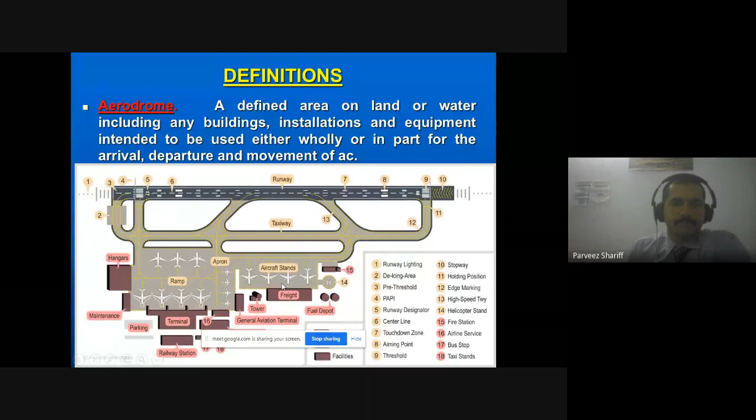Okay, so what is the definition of airfield? Airfield refers to an area of land used for takeoff and landing of the aircraft, and excludes buildings and installations. So basically it can be a runway. Airfield refers to a runway - an area of land used for takeoff and landing. So basically a runway, we can call it the airfield.

So airport means used for civil flying, established to handle international air traffic, and therefore includes the custom house, travel amenities and other things all together. We call it an airport.

The aircraft classification number is a number expressing the relative effect of an aircraft load on a pavement for a specific subgrade strength. So basically, every aircraft has some aircraft classification number. It means every aircraft cannot land on every runway, because that runway has some load classification number, we call it LCN, which can handle the load that the aircraft has when landing.

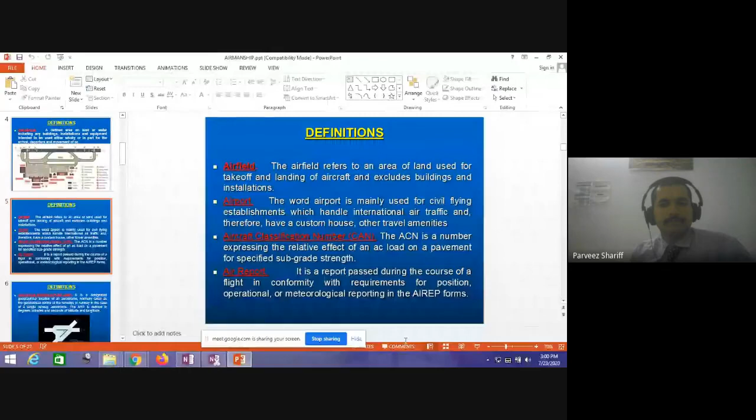For example, it might be a big cargo plane. That big cargo plane cannot land on some small runways where the runway is designated only for small aircraft, as it may lead to catastrophic effects - it may damage the runway as well as the aircraft. That is why aircraft classification number is a number expressing the relative effect of an aircraft load on the pavement for a specified subgrade strength.

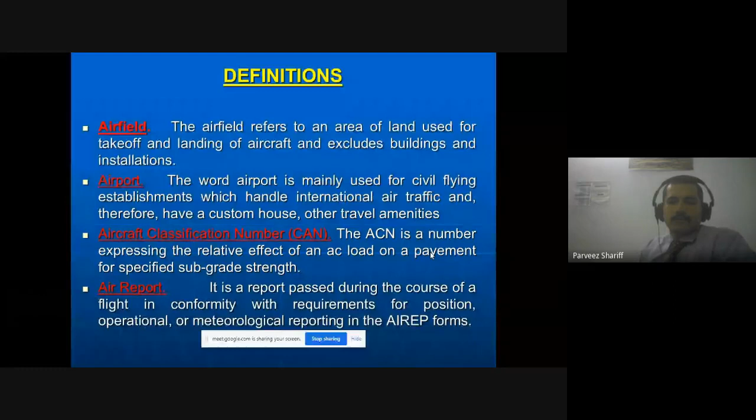So what is the aerodrome traffic zone? If we have an airfield, then from the center of that aerodrome, the point we take is the aerodrome reference point. From that aerodrome reference point, with a radius of say 1.5 nautical miles and to a height of say 2,000 feet, this entire area we call the aerodrome traffic zone. So any aircraft which needs to enter this aerodrome traffic zone has to take clearance from the air traffic control of that aerodrome.

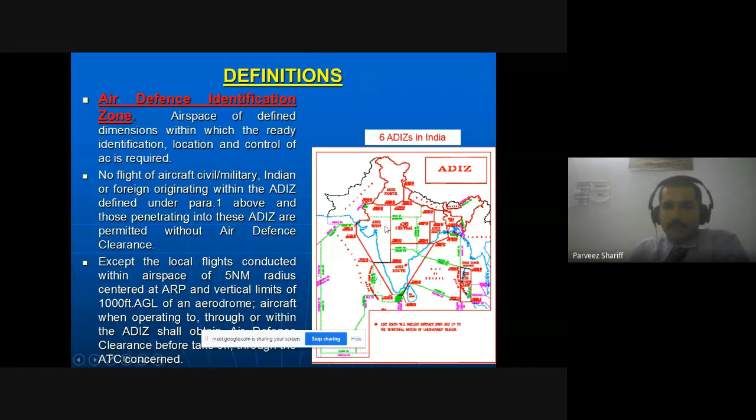We'll see one small video at the end so that we can understand how these air traffic paths are defined. Now there are different

boards and services: Air Traffic Advisory Service, Air Traffic Control Center, and Air Traffic Clearance. Air Traffic Advisory Service is responsible for providing service to aircraft when it is flying under IFR flight rules or IFR flight plans. IFR stands for Instrument Flight Rules.

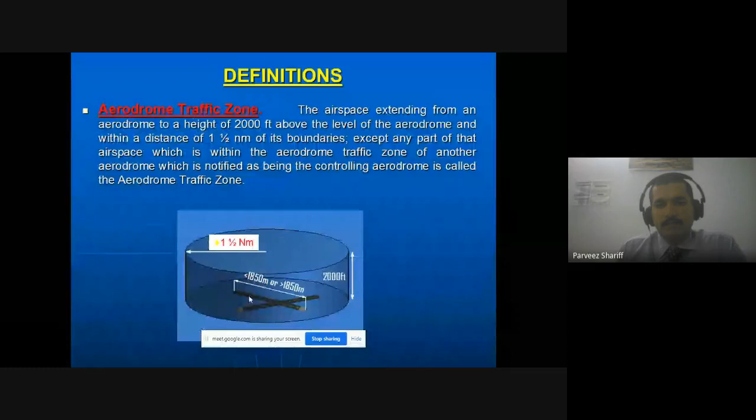Air traffic control centers operate within control areas, meaning any aircraft coming under the control areas. What is the meaning of control area? As I told you before, if any aircraft comes within this range and at an altitude of 2,000 feet, then it means it's within the control area of that aerodrome.

So if any aircraft is within that area, air traffic control center will take control of that aircraft and give the necessary information. It also provides a flight information service within the flight regions. The third service it provides is an alert service.

Basically, if any aircraft loses contact with any ATC, the nearby ATC will issue an alert to the search and rescue team, so that the team can find the last known location of the aircraft.

Next is air traffic control clearance. That is authorization for an aircraft to proceed under conditions specified by air traffic control. It means whether to take off, land, or hold position. Those are called air traffic control clearances.

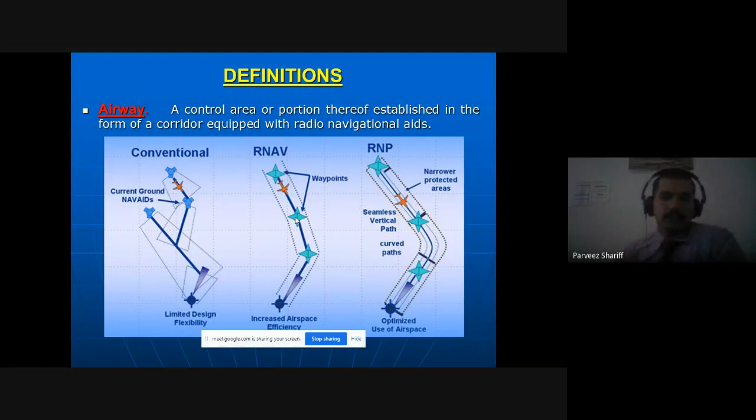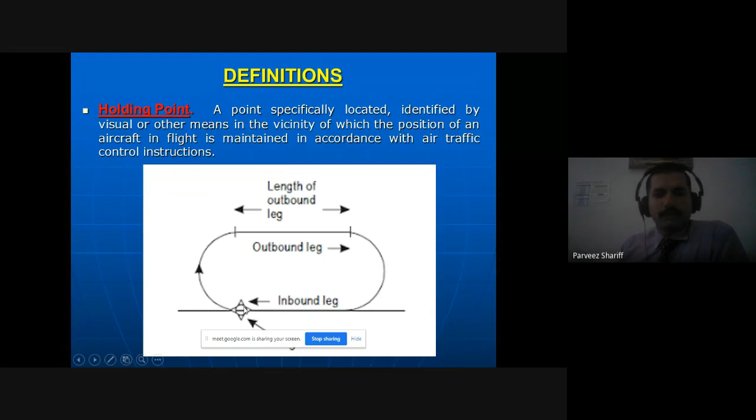So the holding point is, for example, if this is the taxi path, the aircraft comes here before it holds position. That point we call the holding point. Next, heading - what is heading basically?

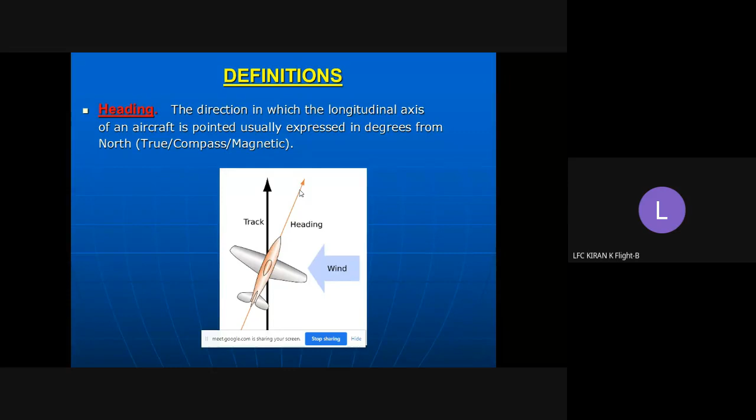The aircraft's longitudinal axis, where it points, that is called... direction? Direction of what, in which direction it is pointing? No, it is not like that. Heading and pointing - the heading direction and the movement direction at times will be different.

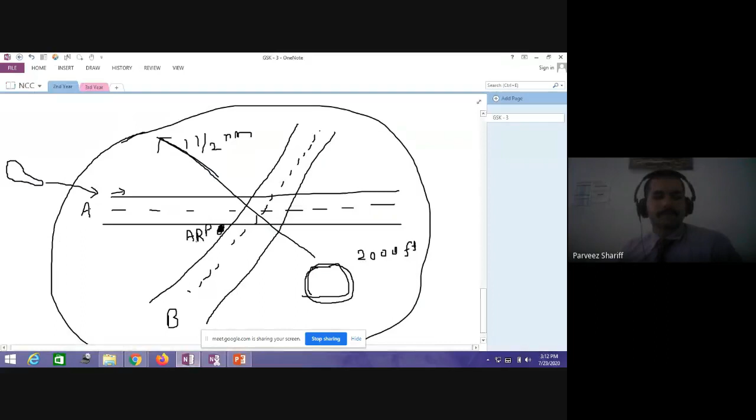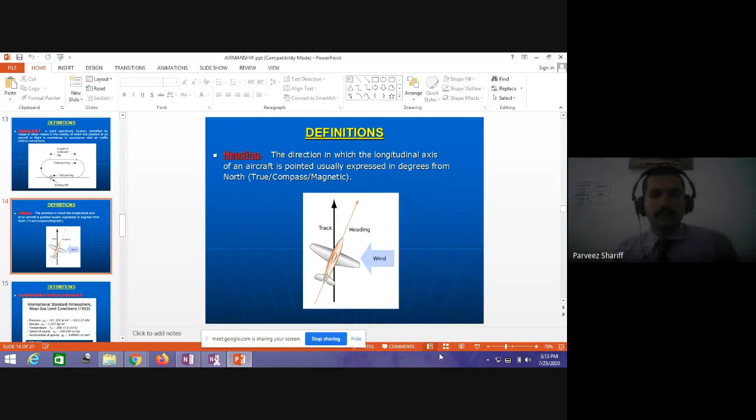So I am writing a 2D diagram here. The aircraft is supposed to move in this direction, and it is moving, but since the crosswinds are so heavy, sometimes the crosswind makes this longitudinal axis point in a different direction. This direction we call heading, and the other is the movement direction, actually where the aircraft is moving. This is measured clockwise in the compass direction, not counterclockwise - it's clockwise direction in the compass, which is indicated. So this we call heading.

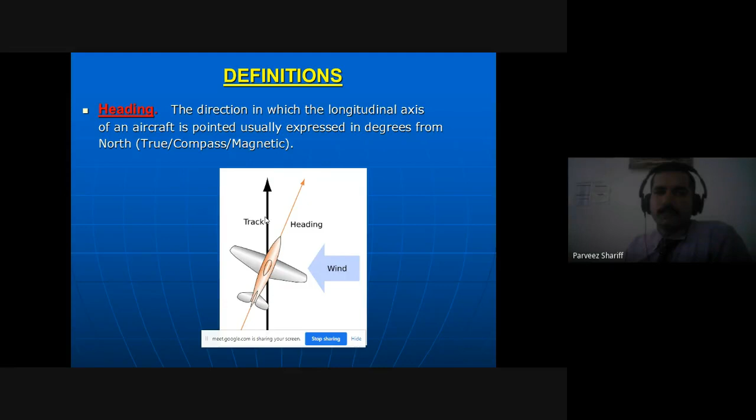If there is heavy crosswind, it tends to change the heading. For example, if you want to move at say 270 degrees, the heading might change, and it might be moving toward 280 degrees - the compass might show 280 degrees. Next, talking about the standards.

If you look into these standards, then the pressure level, the density of air, the temperature and speed of sound are mentioned here. The standard pressure at mean sea level is represented as 1013.25 hectopascal. That is its unit. And density of air is 1.225 kg per meter cube. And temperature is 288 Kelvin or 15 degrees C.

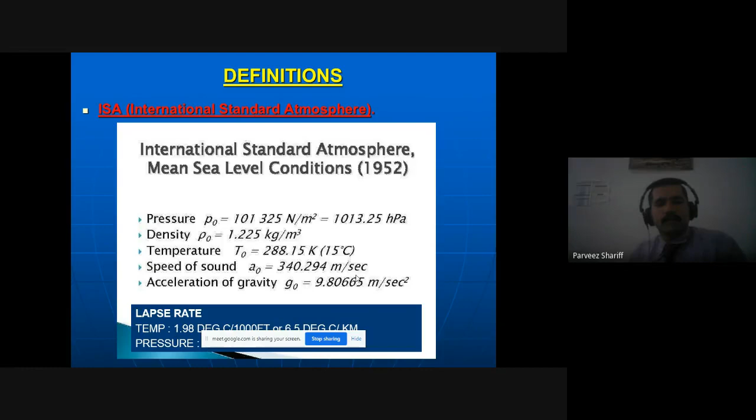And the speed of sound is represented with 340.29 meters per second. And the ground gravity, you all know, is 9.8 meters per second square. And if you look at the temperature variations, for every 1,000 feet, the temperature drops by 1.98 degrees. And for every 30 feet in altitude, the pressure drops by 1 millibar.

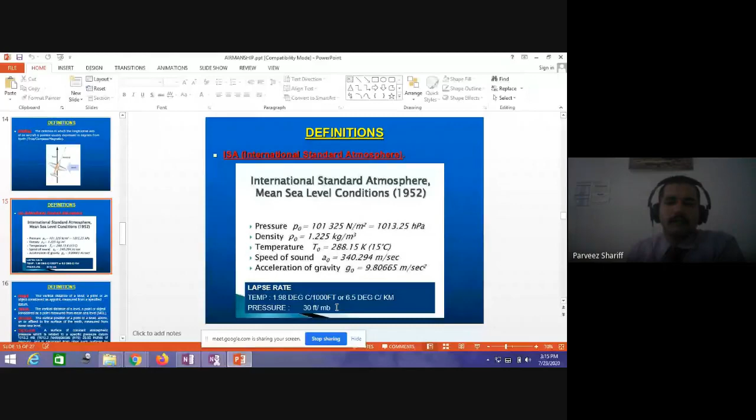Now we'll look into a few more definitions. The difference between height and altitude. See, height and altitude are two different things. So let me show you this diagram here. This is the sea, and say the aircraft is moving in this direction. Now, the distance from this position to this position, you can call this altitude, because we are referring with respect to mean sea level.

But when the same aircraft comes here, I'll just copy this. If the same aircraft comes at this point, then the distance between this land and the aircraft, we can call it height. Whereas if we again measure from this to mean sea level, then this we call the altitude. So this is the basic definition of height and altitude.

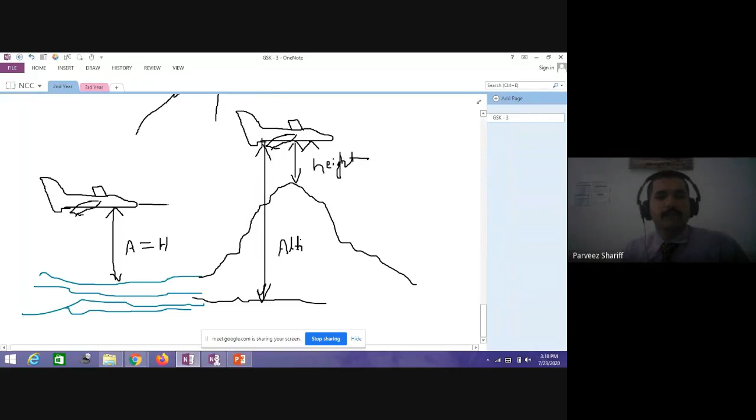Then there is something called flight levels. Every aircraft flies at a certain height, and it has to follow international flight rules. For example, this aircraft comes here. It might be flying at, say, flight level, we call it FL, 100 here. And here it might be flying at flight level 500. Flight levels are defined with respect to the pressure.

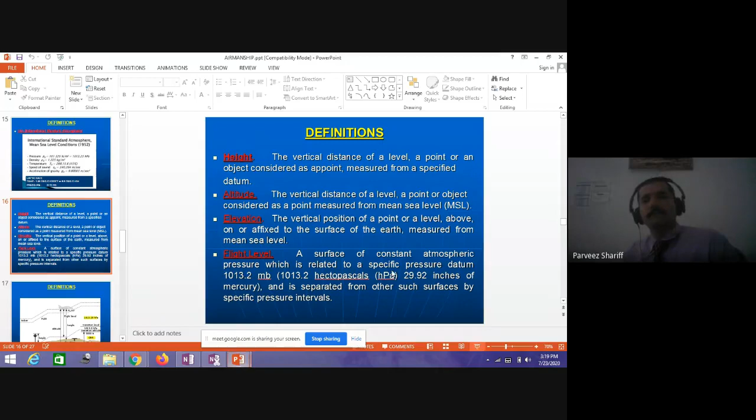So what is the air pressure at this area at altitude? That we call the flight level. And again, the air pressure at this point or this elevation with respect to the mean sea level is designated by another flight level number. So this is how flight levels are defined, basically with respect to the pressure at that elevation level.

You can see the flight level from the diagram. When the aircraft is flying at this level, it might be at flight level 50, but then it increases its height. MSL is the mean sea level, and throughout this image the mean sea level remains constant. Whereas the roughness of the ground keeps varying; it is not constant. At this point it is increasing, then decreasing, and so on. This we call the elevation, as I told you before.

Then from this elevation point to this point, we call it the height, as I told you before. And from mean sea level to the aircraft, we call it the altitude. So altitude is always measured with respect to mean sea level, and the pressure variations always exist in this flight level. That will define which altitude the aircraft is flying at.

So that will keep the two aircraft safe, because another aircraft is flying at, say, flight level 70. So it means however he moves, that pressure remains constant. If you see here, when it comes to this point, it remains constant. It is not flying like this, it is flying above. So the constant pressure is maintained through this path, and it is constantly moving along this path. So that will keep the two aircraft free from collision.

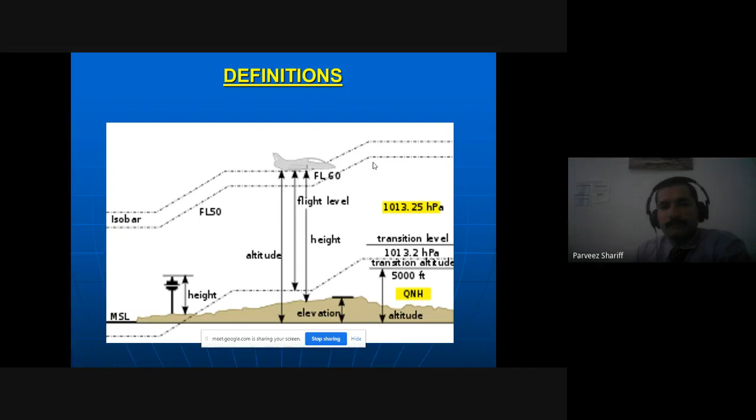Next, transition altitude: the altitude in the vicinity of the aerodrome at or below which the vertical position of the aircraft is controlled by reference to altitude above mean sea level or height above the aerodrome, depending on whether QNH or QFE is set on the altimeter. QNH and QFE are two terminologies used with aircraft instruments, set in the altimeter. If it is set to QNH, it will measure the altitude with respect to mean sea level. If the altimeter is set to QFE, it will show the height with respect to ground. So that is what it means.

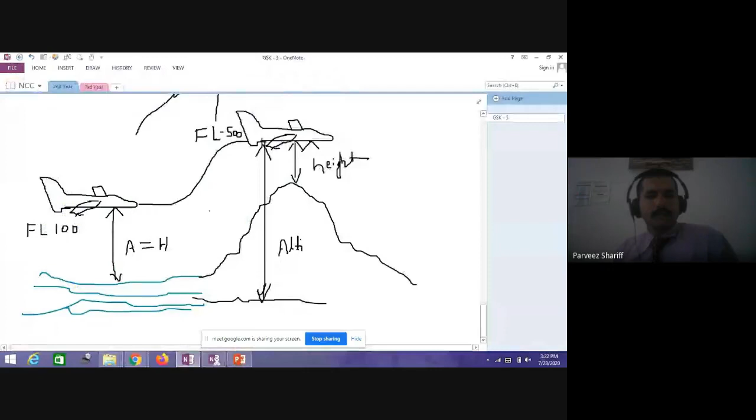Then transition layer: the airspace between the transition altitude and the transition level. The depth of the layer will normally be insignificant and will in no case exceed 500 feet. The transition layer is nothing but, for example, if I write here, let me go down here and write.

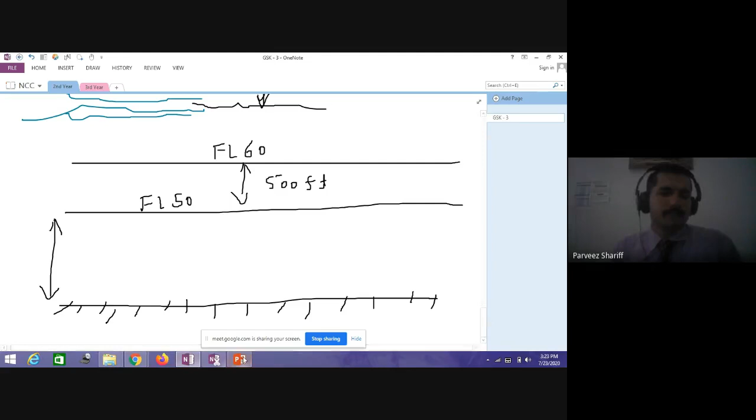So let us consider this is the ground. Just to make you understand, think of this as vertical separation; this is the altitude or height, because I have not considered mean sea level here. So this is just the ground. From this ground, this might be flight level 50, this might be flight level 60. So the difference between these two layers is a gap of 500 feet minimum. This is the minimum distance between the two flight levels. So that is what it means.

Next, transition level: the lowest flight level above the transition altitude. It will vary in accordance with the relationship between QNH and the standard pressure at the aerodrome. As I've shown you in the previous diagram, this is the transition layer. For example, this aircraft is taking off with the QNH setting. QNH means it will show altitude with respect to mean sea level. Then it enters the first flight level, then goes to the next flight level. It depends on how the flight plan is planned.

It might be supposed to fly at, say, 10,000 feet. So it will cross the first flight level, go to the second flight level, and might be flying at the second flight level. Then at the landing approach, it has to reduce its altitude, so it will come back from that flight level to the next flight level. These are the transition levels, TL, and this is the transition altitude. The separation between these two we call the transition layer.

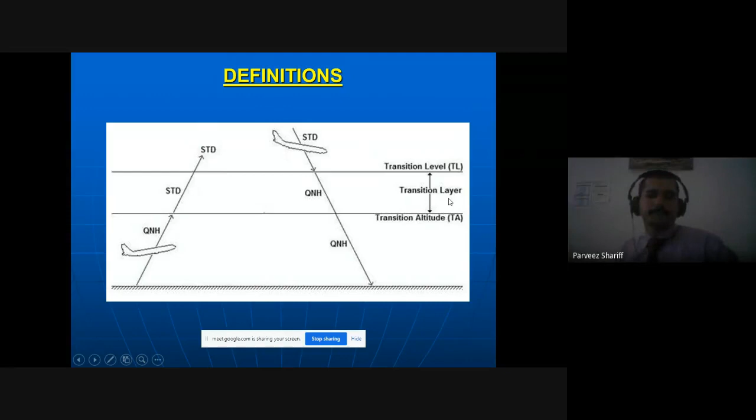As I told you before, the two terminologies are QFE and QNH. Basically these are readings given from the aerodrome. QFE will be different at different airfields. For example, the Mangalore airfield's QFE is different because it is situated at a different height from sea level, and Bangalore airport's altitude with respect to mean sea level is again different. The pressure is measured locally at the aerodrome, and that value is given and set. Once you set QFE, when you are on the ground at that aerodrome, it will show an altitude of 0. This helps an aircraft during landing and takeoff.

Once the aircraft has taken off, they switch to QNH to know the altitude with respect to mean sea level, because they are no longer at that aerodrome, so it doesn't matter. With QNH they set the pressure value, 1013, the air pressure with respect to mean sea level. As you go higher, the pressure drops, and accordingly the altimeter works and gives you the altitude. The standard altimeter setting, as I told, is 1013 millibar, at which the altimeter indicates altitude with respect to mean sea level.

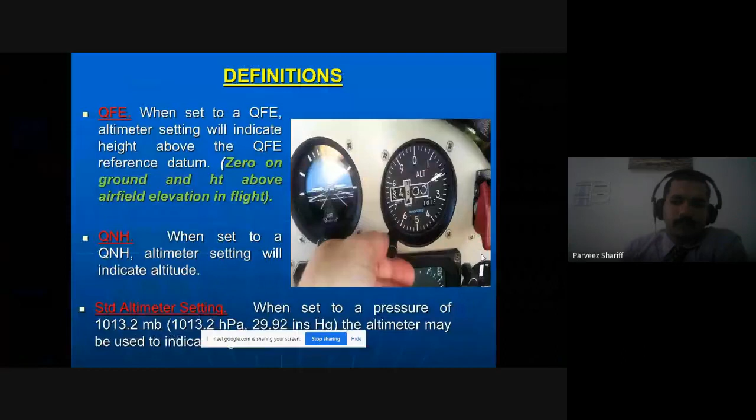Coming to this thing, prohibited area and dangerous area: prohibited area is when you are flying, when you are in air. Dangerous area is when you are on land. Keep this in mind. This is the basic difference between the two, so don't get confused. Prohibited area means, for example, you are flying and you are not allowed to fly over that land or water. That is called a prohibited area.

Whereas dangerous area means the aircraft is already on the ground, and it is not supposed to enter into that area because it might be under construction or some problem might be there. That is why we call it a dangerous area. Hope, Kiran, it is clear to you.

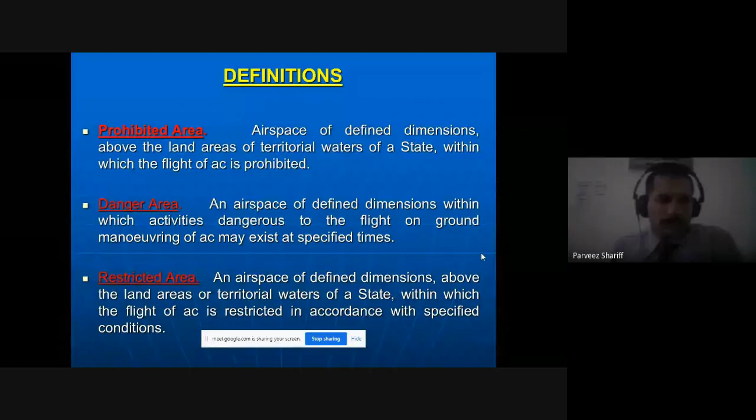Okay. So again, restricted area is where the aircraft, when it is in the air, cannot enter over any land or water bodies above which it is restricted. It might be a defense area where civil aircraft are restricted to fly nearby or to pass by. So that is called restricted areas. So these are some flight paths.

Visibility is another terminology. Visibility is the atmospheric condition which is very much required. It is measured in distance. Basically the visibility required is at least 5 nautical miles, 5 kilometers to 8 kilometers. Visibility should be there for any aircraft to take off.

And load class, yes. Load classification number is the number which is given for a runway. Please do not get confused: the runway number written on the runway is different, and the load classification number is different. Load classification number defines how much load that runway can take or what kind of aircraft it can allow to land.

It depends on the type of construction, how that runway is designed, how much load it can withstand and all those things. Then alert service, as I told, is for search and rescue.

Then alternate aerodrome. Every flight plan prepared for an aircraft has to give an alternate aerodrome. For example, if the aircraft is supposed to go from here to International Airport Bangalore, they have to give an alternate aerodrome in case that runway got busy or some aircraft got stuck on the runway and they could not give permission to land; then it should head to the alternate aerodrome.

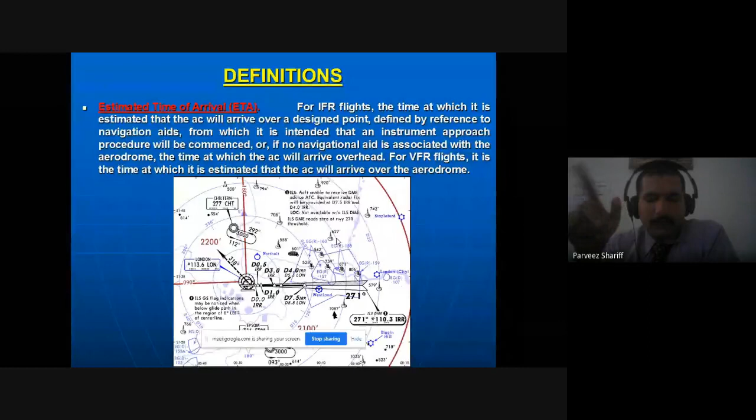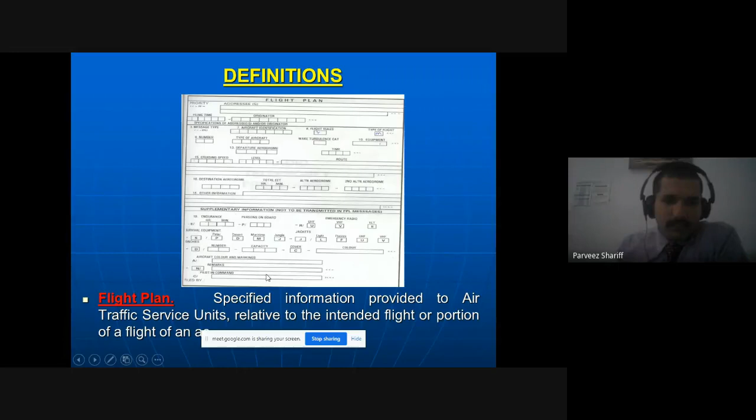Then survival equipments. See, air survivability is one more topic which we'll discuss in the coming classes, where the aircraft has to be prepared for their survivability based on which path they are moving. For example, if they are moving over the water bodies, then they should have a dinghy. They should have the survivability kits which are required to survive on the water. If they are flying through deserts or lands, then the equipments are different. So all those details have to be mentioned in this kind of flight plan and submitted.

Okay, I think we are done with slides. I wanted to show this for your juniors, but I missed this slide today. So anyway, I'll do this for them in the next class. So I'll show you one small video, then we'll wind up this.

Can you all see the video? No, sir. Okay. Can you see now? Yes, sir. What about other cadets? Can you see? Yes, sir. Okay. Is it audible?

Today, about 650 flights take off from one of its two runways. At the busiest, this represents one aircraft every 45 seconds. Of those 650, about 20 flights daily head to Frankfurt. Between British Airways and Lufthansa, flights on this route depart more than hourly throughout the daytime. This makes Frankfurt one of Heathrow's most frequently served destinations. Despite the unremarkable nature of such a flight, the complexity of even this 1 hour hop is enormous. It takes dozens of people spread out all across the continent to coordinate and navigate just one of these flights safely. This video is all about everything that happens in the minutes it takes for a plane to get from its gate at Heathrow to its gate in Frankfurt.

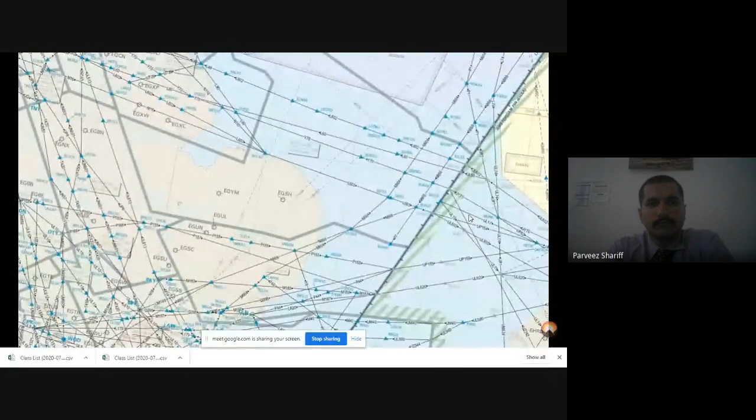So aircraft not only need to fly on these roads, but they also need to follow the rules of the roads. Looking at this map, you can see why, for example, you won't see many planes flying over this area in the east of England. There just aren't many airways there.

Eurocontrol sends the flight plans through a program to check that they follow these rules, but if the computer rejects it, then it goes to these people, in about 2% of cases, who coordinate with the airline to fix it manually. From there, they'll distribute the flight plans to all the air traffic control centers that each aircraft is expected to fly over. That process happens before the flight has even taken off.

Going back to that British Airways Heathrow to Frankfurt flight, once their plan is approved, the plane is fueled, loaded, and ready to go. The pilot will get approval from British Airways' flight dispatcher and Heathrow's ground control to push back. Ground control is responsible for navigating all the vehicles and planes safely across the apron until they reach the runway. The moment an aircraft gets to the runway, they are then the responsibility of tower control, which, assuming all is well, clears them for takeoff.

As the plane reaches altitude, it will be passed off to the London Terminal Control Center, located here near Southampton, which navigates aircraft through the complex London area airspace until they reach 24,

So this is the air traffic control center. As I told, this is the red one which is showing here, that is the aerodrome. So once the aircraft has taken off, the control is taken over by this air traffic control center, which will be monitoring the flight of this aircraft.

500 feet, or flight level 245, which for this flight should be just about when it reaches the coast. From there, they'll be transferred to the London Area Control Center, which is physically located in the same building, to navigate them across the channel. Once they reach about halfway across, however, they leave the UK's airspace and enter Belgium's. With that, they are now the responsibility of the Maastricht Upper Area Control Center, also managed by Eurocontrol.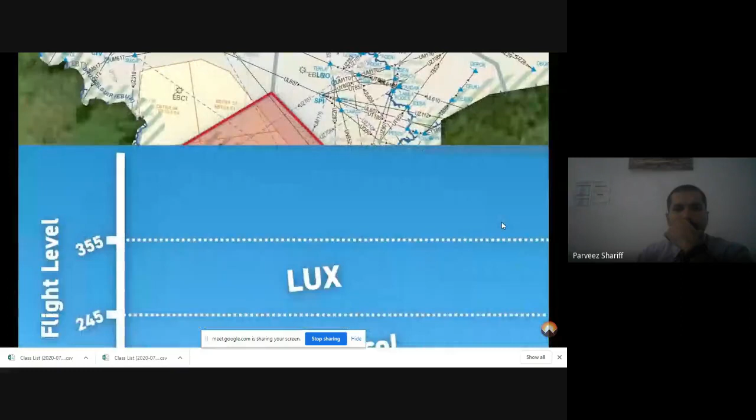Each of these sector groups is then divided into sectors themselves. Now, sectors can be divided both horizontally and vertically. For example, there's the Luxembourg sector between flight level 245 and 355, and also the Luxembourg High sector above flight level 355. At the very busiest times, each sector will have its own dedicated set of controllers.

At less busy times, though, they can and do combine the upper and lower sectors together, so they're staffed by one set of controllers. At the least busy times, such as in the middle of the night, they'll often combine a number of sectors. For example, the entirety of Belgian airspace is typically controlled by one set of controllers in the dead of night. In charge of each sector are 2 controllers working as a team. One is in charge of talking to pilots, the other is in charge of talking to their counterparts at other sectors to coordinate handovers.

There are rules about how close an aircraft can be to another in order to avoid any chance of mid-air collision, and the controller's job is to make sure these rules are not broken, or, if they are, to get to the correct level of separation as soon as possible. An aircraft must be either vertically or horizontally separated from all others at any given time.

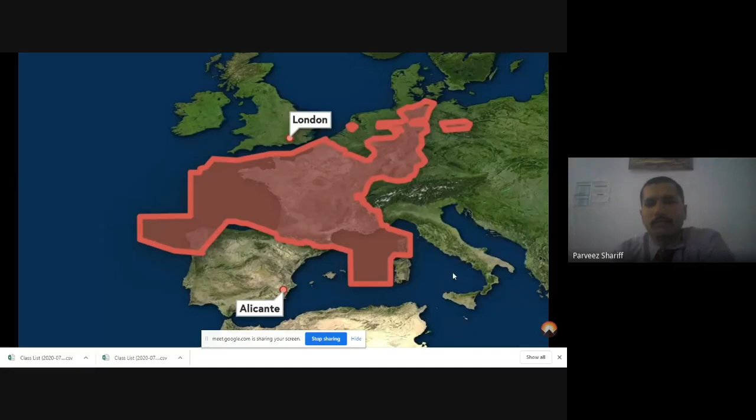Now, when a flight receives a delay by Eurocontrol, the airline essentially has two choices: accept the delay and wait it out, or fly a different route. Airlines have access to Eurocontrol's system to help them make this decision.

Eurocontrol's network management role is really most applicable on the worst days for flying in Europe. Their job is to make the bad days as okay as possible.

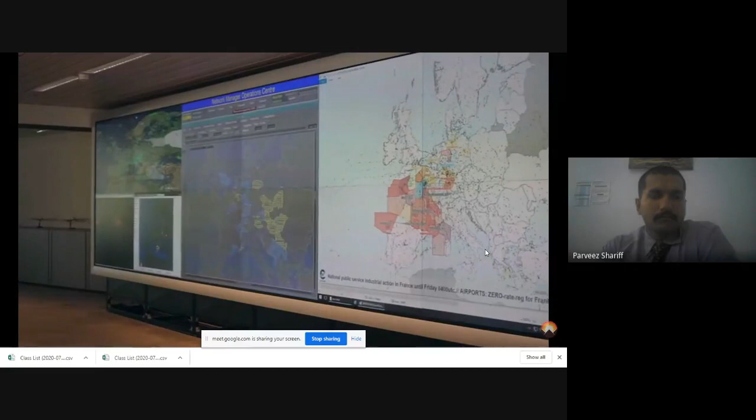An example of a really bad day for flying was Thursday, May 9th, 2019. The main issue was a large-scale French air traffic controller strike, meaning there was little air traffic control capacity in French airspace, one of the busiest areas. If you look at this map, it shows the magnitude of the impact on the sectors that they cover.

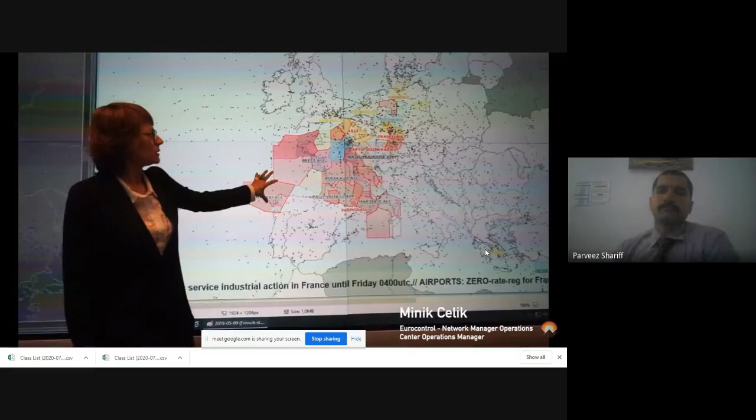Okay, so I think you have understood the significance of air traffic controllers and how important it is in flight control. So, okay, fine. Any queries? Anyway, for you, this was just an introductory session. First thing.

You're all listening to me, or did you go to sleep? Listening, sir. Only one person is responding.